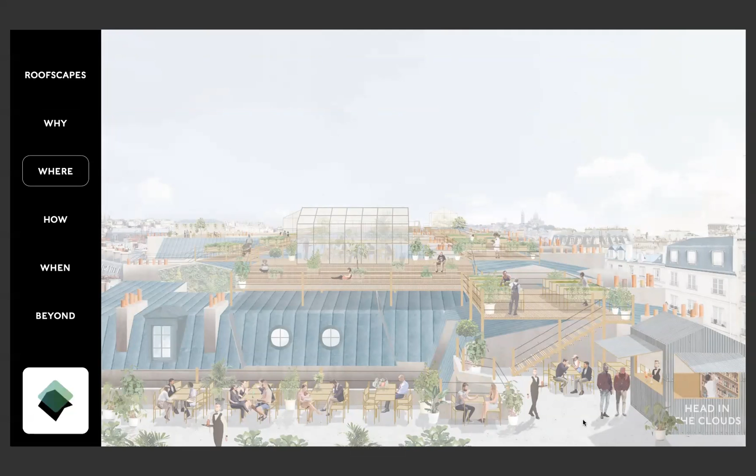Just in Paris and its ring, this could unlock over 3,200 hectares dedicated to carbon-free food production and consumption, reducing packaging and dramatically cutting down on transportation.

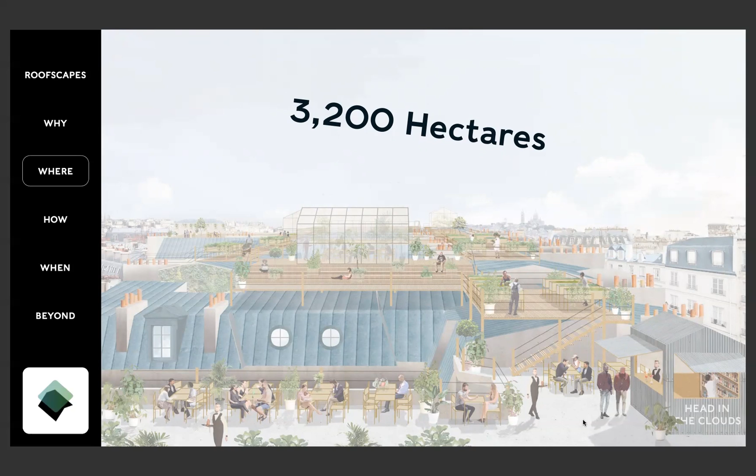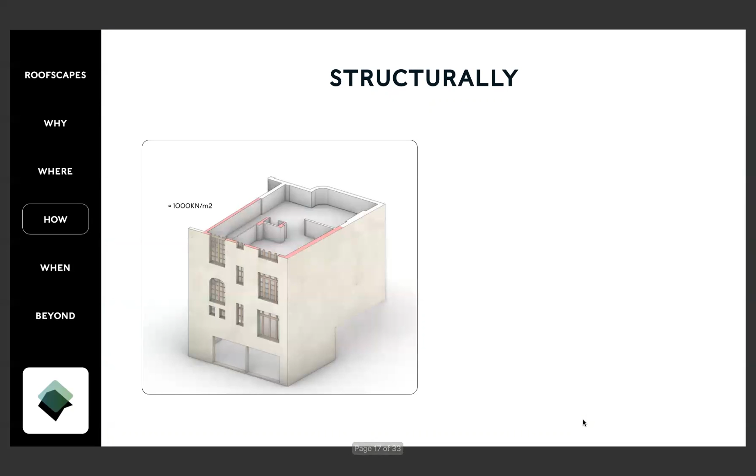Structurally, ROOFSCAPES is projected to support 400 kilos per square meter, sufficient for the 30 centimeters of soil demanded by the local farmers we're partnering with. ROOFSCAPES uses the over-designed retaining walls of adjacent buildings to deploy its structures.

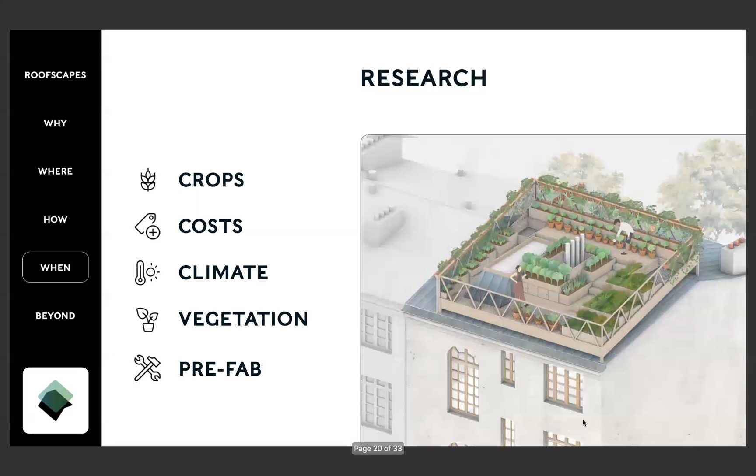This research is going to be implemented as a monitored pilot project in the spring in Paris to assess its numeric metrics. Beyond this, ROOFSCAPES is set in a larger urban resilience plan.

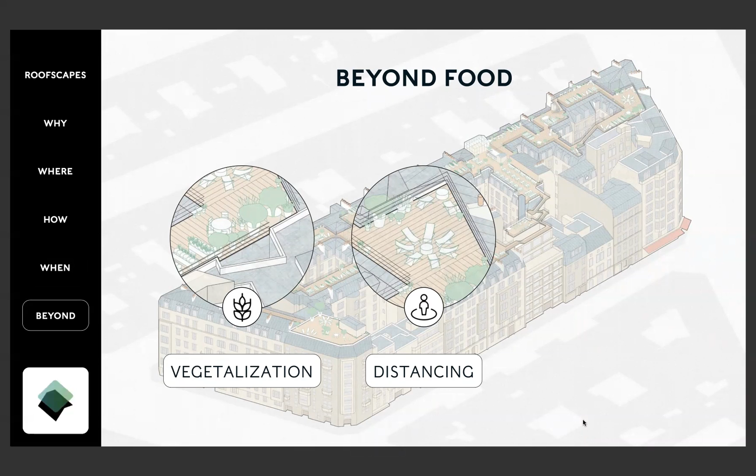It deploys green roofs that can reduce urban temperature by up to 4 degrees and restore biodiversity. It provides additional outdoor space, a critical public health need in times of global pandemic. And it retains water to help the region's infrastructure deal with recurring overflow.

ROOFSCAPES is well aware of and a fervent advocate for the United Nations Sustainable Development Goals, and uses the SDG target framework to assess its success in building economic growth while tackling climate change and answering environmental protection.

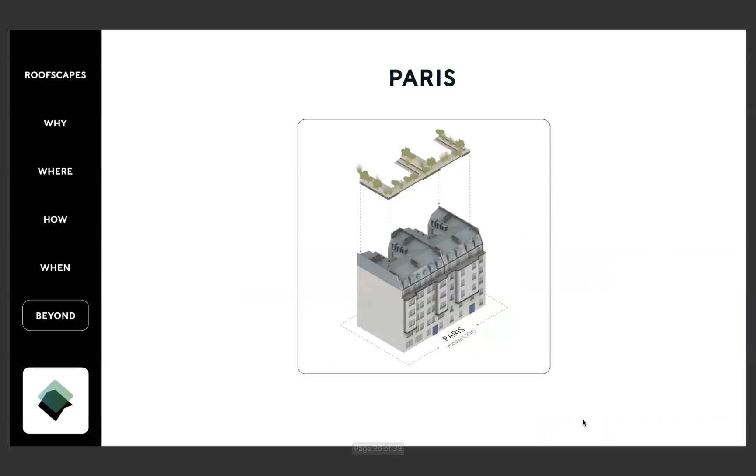Beyond Paris, ROOFSCAPES is adaptable to all historic city centers that increasingly suffer from underutilization of their roofs.